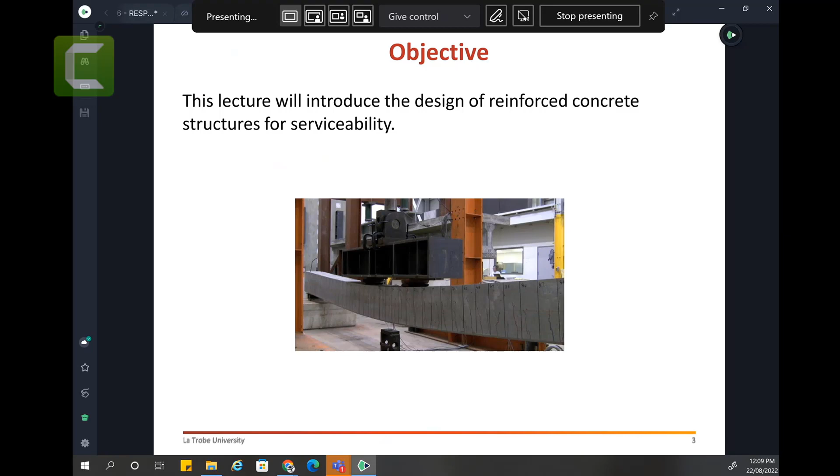So always practice everything. And what I'm trying to say, as we go through the deflection check and design, try to remember what we did last year, which was we didn't do anything, only a 5-minute or 2-minute check. It was one formula to use, and see what we're doing today. That will build a good understanding in your minds as well.

So we got a couple of sections, but hopefully I do them within 40 minutes or less, just so you can have a careful run through a very good example at the end. So there is some introduction here. It's kind of general. I will take you through. And yeah, deflection, we're trying to avoid deflection for serviceability. So we talked about this last year as well for steel or timber.

What we did up to week 5 was a strength check. We need to make sure the beam will not break and come down due to bending. The other check we did, that was last week as well, is shear. Shear is the other action that stresses our concrete beam. So bending, we talked about it before. Last week we talked about shear. We're good at it, and now we have to check for serviceability.

And with deflection, it will not collapse and fall down. However, too much deflection will compromise the standard requirements. So engineers are required to always make sure they document what deflections they had or follow standards. Too much sagging may crack the materials, the walls which the slab supports, the finishing materials like tiles. If your slab deflects more than 20 mil for larger spans, or 25 mil in shopping centers, then all the tiles and the finish will start popping up and getting cracked, which is a fault by the designer.

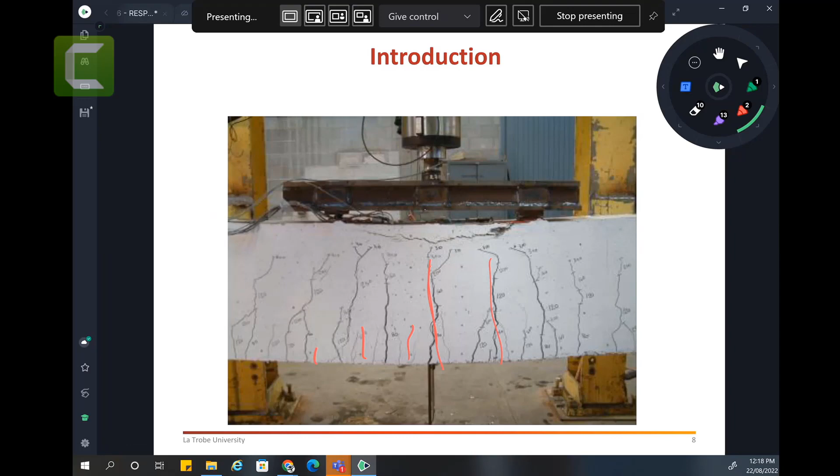And they are micro cracks because it's well designed. As an ultimate design, we designed for the ultimate case. Cracks will be generated all over the place, progressing to the neutral axis, and that's where the problem is going to happen in terms of finding the inertia value. So basically, these slides are summarizing the story of how we have primary cracks and secondary cracks, which will cause that complication, and we're going to see how we can control those.

So those randomized, complicated, different progressions of cracks will eventually cause extra curvature in the RC beam. We know from steel and timber, if we got a piece of timber or steel, they will all elastically flex and curve. That's fine, but we have good tools to calculate this. And if you remember, I've quickly searched for one of those tables like this one here.

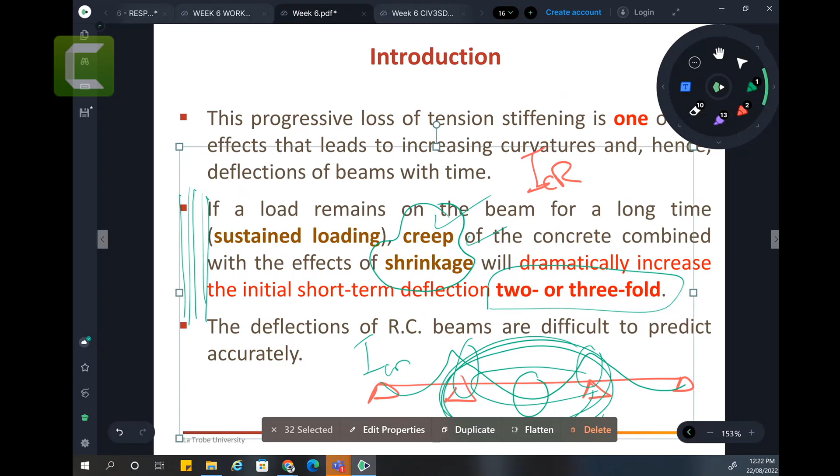The good thing, as I said, with the second item talking about creep and shrinkage, the standards gave us a very, very friendly formula. I will show it to you in a few slides and you're going to practice it, which helps us consider the creep and shrinkage and add it to our deflection. This is called the long-term deflection.

Now, with the I cracked business I was talking about, that's where you need to employ some mechanics of solids skills to go and calculate it. We will talk about this, and this summarizing point here was saying that's why it's difficult or a bit lengthy to calculate RC, and we're working with a material where there is no relationship to tell us where exactly the crack is moving. There is no such formula. Maybe if you guys research the new technologies, you will find a better gauge for that. But it's always an experimental formula that we follow.

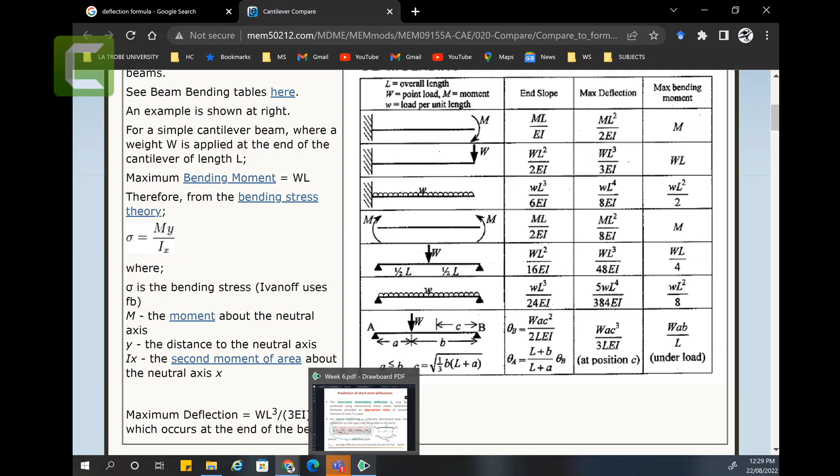So if you have a simply supported beam with a point load, you can use this and it will give you the theoretical analytical answer straight away. If you have uniform load, you can use this. This one is just another form. You're definitely going to use it in your examples and maybe in your exam or test if you have deflection questions. So this is a simplified deflection formula, which helps us determine the short-term deflection delta S. Next, I will talk about its details and ingredients.

So let me quickly talk about this part here. Instead of being a function of W, the loading, they made it simple because, as I said, one of the problems in concrete design is that it's not about what's happening at one point or one section, like here at the maximum.

It's also a function of what's happening at the ends. Okay, that's why we use this friendlier, easier or better formula, where it's going to be a function of the bending at the ends and the bending mid-span. Okay, so that was the reason why we have a different presentation of the deflection formula.

It is a function of bending because we understand when we check deflection, it's not only about what's happening at the maximum point in the beam, like what we did for reinforcing bars. We go to the maximum bending and design for it. No, here we have to look at the entire beam, what's happening over the span. And we know here we may have a negative, positive, negative. So how are we gonna put them in this mix? This formula will help us to do this.

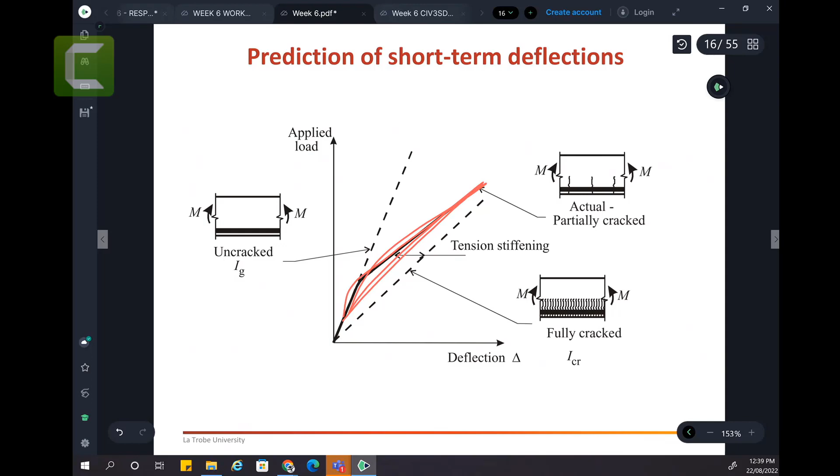That's the actual partially cracked section. So let's come back, taking you back to the main equation that will help us calculate the short-term deflection. This is all okay, just taking from the actions. This one is straightforward. We're going to show you how to find the effective span, these are straightforward here. This guy, we're talking about this guy. So before we can find the I effective average over the span, we have to find I effective, which is here, and that's where we stopped just now, which is here.

Here we go. And the standards try to guide us and say, use this relationship to find your I effective, right? And make sure it's going to be less than I effective maximum. And you will practice this carefully and also go there and question, as we discussed typically over the workshop, try to make these questions, why is this happening? And then you're going to learn more. So there are a couple of properties we need to calculate typically for this guy here.

Some of them you need to employ mechanics of solids, I think most of them. So let's start, the slides will show you how we find each. I think most of them you've studied over the past three and a half years, but again, if we don't practice things for several months, we're going to forget it, so that's fine.

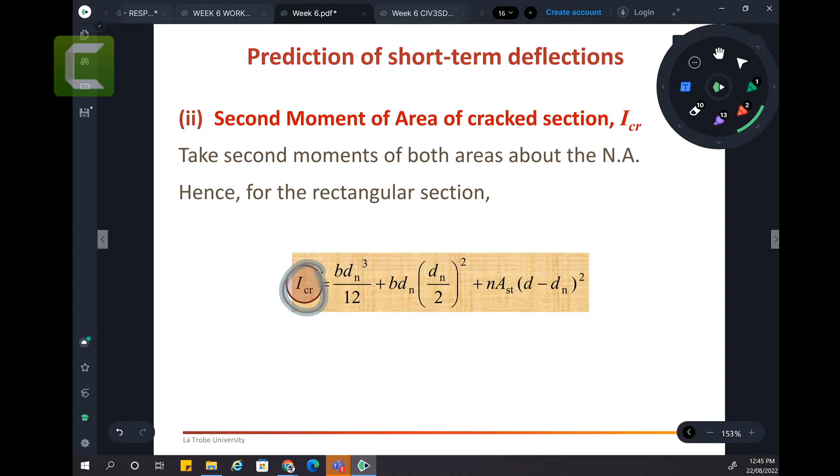So here we're just applying the second moment of area method to calculate the I crack, something you did in mechanics of solids, and you're going to remember it from your examples. The only new thing here is we converted the steel area to concrete area by multiplying it by n. That's all you're going to see this semester.

So we're done with the I crack. I'm just staying focused with what we're doing here. We're trying to calculate this guy, and as we said, this is a function of I effective. We're done with these two. Now we just need to know how to find the cracking moment.

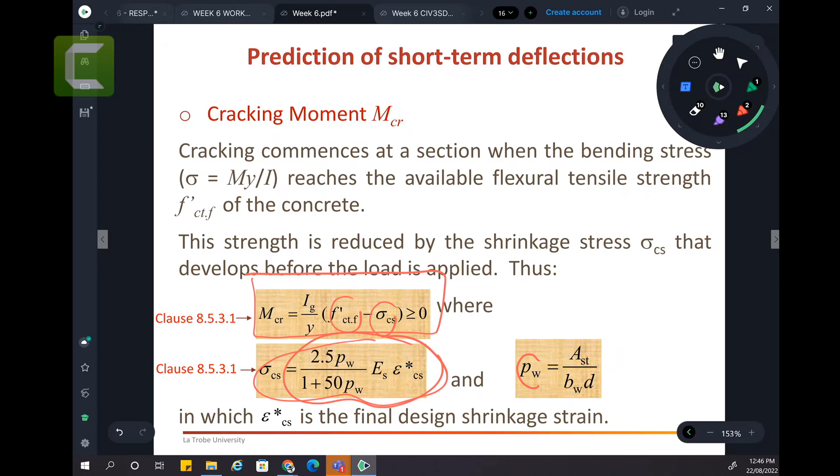Inside this formula, they have added some properties to consider for this design, so you can straight away calculate it. They made it a function of the compressed stress, because we know we're compressing the concrete side and have to consider it in our calculations. Maybe we're going to go through these details in the example as well. Don't just look at it - add some imagination as you look into the parameters and see what they physically mean.

So I think by now, there was another property, which is the moment, and this comes from statics. We will show you - the M star was the last parameter in the equation for finding the I effective formula. That was the last property we have there.

M star short term just comes from the analysis, but you have to only take the short term, which is the WS, and we will talk about this. We don't take the ultimate - we don't take 1.2 by 1.5 dead load, live load. So pay attention to these things to make sure you're driving it the right way.

There are some checks to do, because when these slides talk about finding MS, it depends on how it's compared with the M crack. If it's less, then we can use - this is really important to say to you guys - there are some shortcuts to do.

There are some shortcuts to do in finding I effective. If your M star is found less than M crack, we can straight away say your I effective is equal to I gross. That's how we can do it. I think we're going to have a couple of examples which show you this.

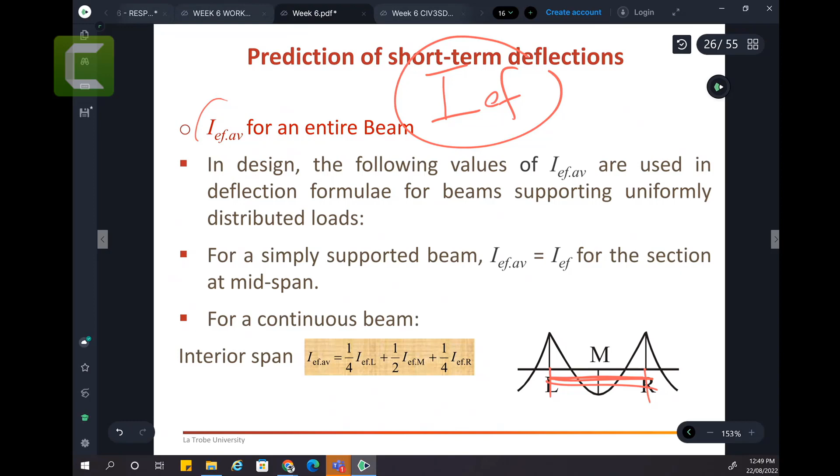After you find the I effective, you have to treat it over the span, and that's what we're going to do in our example, which we need to start soon. But in a test or exam, you may be given one spot to worry about, or you may be told that the I effective is the same over the span and you don't need to repeat it.

So that's a quick go-through which takes most of the time, the short-term deflection. Now I'm quickly going to run through the next few steps in one or two minutes. This one is not really too much - deflection is, here we go, that's all what you need to know. So what we talked about so far is this guy, and I showed you that formula, which is a function of I effective, I effective average, etc.

So up to now, you should be able to calculate this. Then what we're saying, go and calculate sustained. Now, don't think you need to repeat everything again. It's just going to be a direct relationship. It's just a ratio, and what's going to change from here to there is the loading. Here, we're just going to calculate the sustained load on the beam, like the dead load.

The dead load is sustained. We're going to consider it, and you don't need to repeat what we've done before. You just need to use ratio. You're going to see how we do it, and then you multiply it by a KCS factor. KCS factor is the creep and shrinkage factor, which we're going to show you how to calculate. It's just a standardized formula. We will use it based on your top and bottom reinforcement, compressed and tensioned reinforcement.

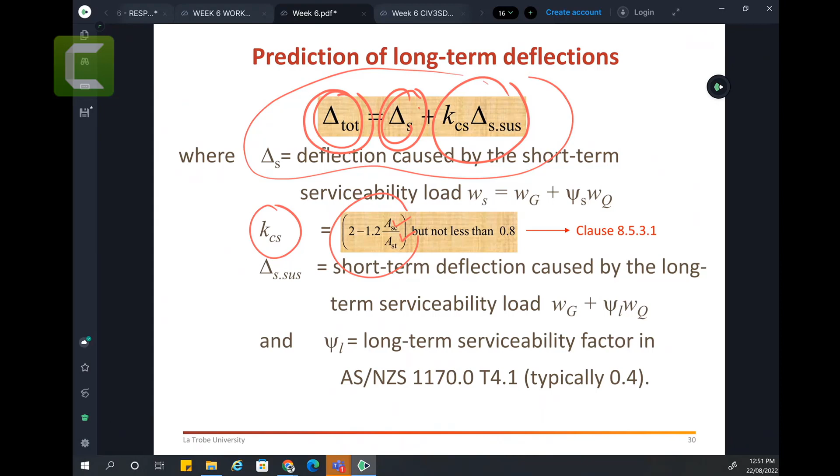So that was about calculating your total deflection. So this is your actual deflection after 20 years or so that your concrete beam will experience. It's coming from short-term deflection when your live load is sitting there, and this is the long-term, which is impacted by creep and shrinkage. If you have no live load sitting on your slab, your actual deflection is going to be less than delta total.

In terms of limitations, as I said to you before, it's up to the 1170.0 standard, which you practiced before and you can revisit during the examples as well. That was limiting the deflections we calculate.

Now, let me quickly also talk about the method that I was showing you. It's called the simplified method to calculate deflection. So all those slides we're going through, 33 slides, it is called the simplified deflection method, which most of the engineers use. You remember with the theta V we talked about for shear, there was a simplified one. We use 36 degrees, and there is a refined method, which with theta has a lot of iterations. So that's why we leave it to the software to do it for us. However, with deflection, most of what we do, we use the simplified method, and we're going through it together now.

Now, there is the deemed to comply span to depth ratio. Sorry, the simplified method we did, but this is how the standards call it. It's a deemed to comply method, where you just need to use this relationship. This relationship can give you straight away the deflection. Now, which one to use in a test or exam depends on the question. So you have to study both.

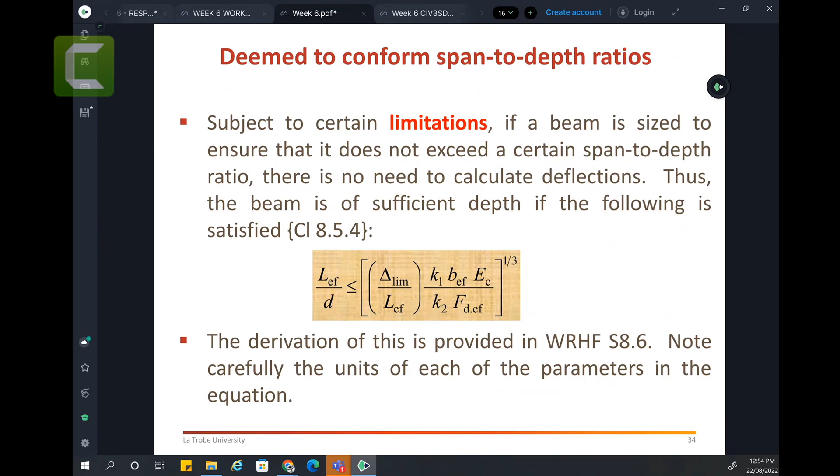But what I'm saying to you, if you want to provide some tender drawings, they give you 1 week to quickly sketch up some drawings for the builder to price a job. I would use these formulas to quickly give me a sense about the depth of the beams and slabs. So it's kind of a preliminary estimation, but it's safe. It's safe because it's deemed to comply by the standard, but it's not economic. You cannot use it for big developments. We use it just to give us in the slabs some thickness to start with, and you're going to practice using them during your examples. There are just some straightforward steps, not too much engineering.

The last section I will just quickly mention to you. This is the last slide. It's crack control. This is just kind of a different chapter. Don't mix this slide with whatever I talked to you before. Before was all about deflection calculations.

And the main thing you need to focus on is just try to remember some mechanics of solids skills, know how to calculate the I effective, then I effective average, because I effective average is going to sit in a formula which will give you delta S. All right. Now I'm saying it because I teach it, but I know you need time to do it, guys.

So as my typical advice is, go through examples, then close your examples, try to solve it without seeing the solutions to make sure you follow, because maybe some of you are not following.

So this slide here is simply talking about crack control, which is just telling you there is also, for serviceability, for complying with the BCA standards, you have to make sure your steel is adequate to control cracks. And we're going to experience this carefully during our weeks when we teach you slabs. And we've already given you some requirements like the 300 spacing, etc. But we will touch on this more.

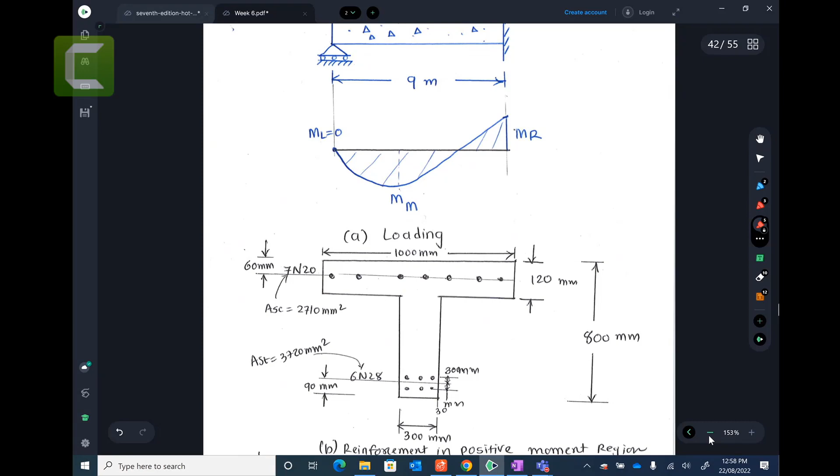So let's do this. Calculate the short and long-term deflections for the propped cantilever beams shown in the figure. I think they have not put the propped cantilevers here, let me plug this one in as well. So these details are given as part of the example, part of the question. So you have these propped cantilevers here, where one side is fixed and the other side is supported by a roller support.

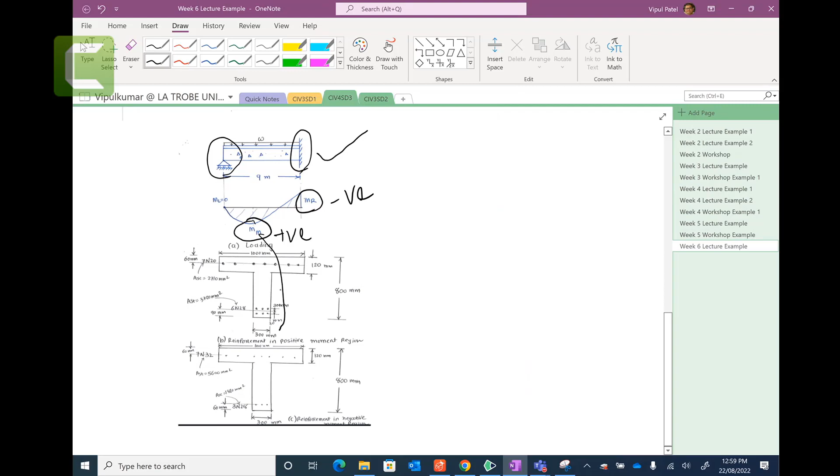The beam is doubly reinforced T sections with the dimensions and reinforcement shown for the positive and negative moment regions in the figure. So the positive moments are here at the midspan, and at the support you have negative moments. So at positive moment, this is your cross section here, and at negative moment, this is your cross section here.

The loading is given: dead load 60 kilonewton per meter, live load 40 kilonewton per meter. Concrete compressive strength is given, the Young's modulus of the concrete is given, the modulus of the steel is given. You can find the modular ratio, n equals the higher modulus of elasticity over the lower, so that's 6.6. The short-term factor given to us is 0.7, the long-term factor is 0.4. Shrinkage strain is given to you as well.

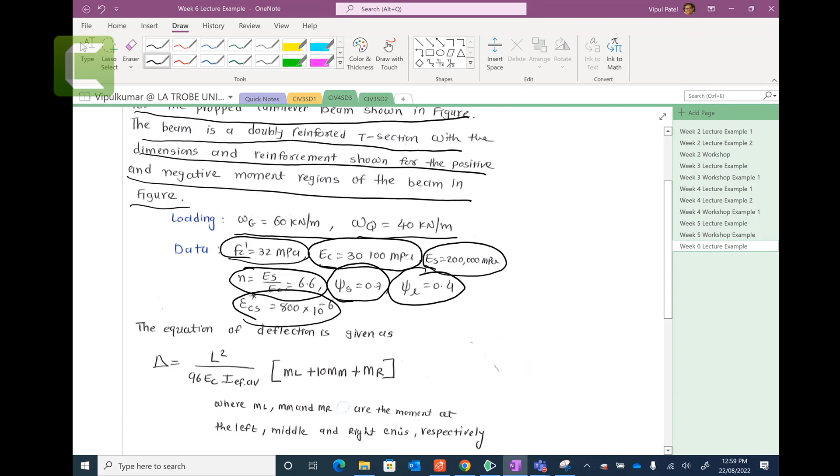So if you want to extract the short-term and long-term factors, we have standard AS 1170. You remember this one from SD2. You don't need to carry these standards, by the way, this is just for your reference. Table 4.1, short-term and long-term combination factors. 0.7 based on the different classifications is given in 1170, but it's given in our example. So you don't have to worry, but I'm just showing you that it is coming from 1170.0.

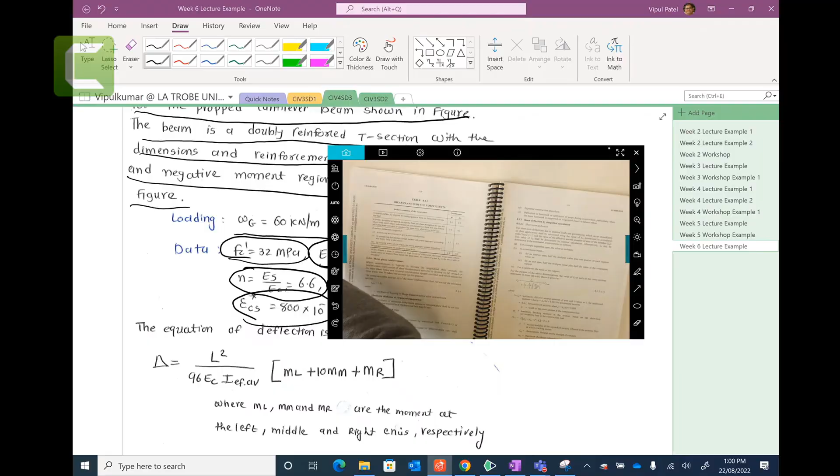Ec, and this one I think is also given in our standards, if you go back to section number 3. Here you go. So in that case, Ec is 30100, and for steel, somewhere they mention it as well. Yep, modulus of elasticity for steel, you have 200,000 megapascal. So all the details are given there, but also already given in this one.

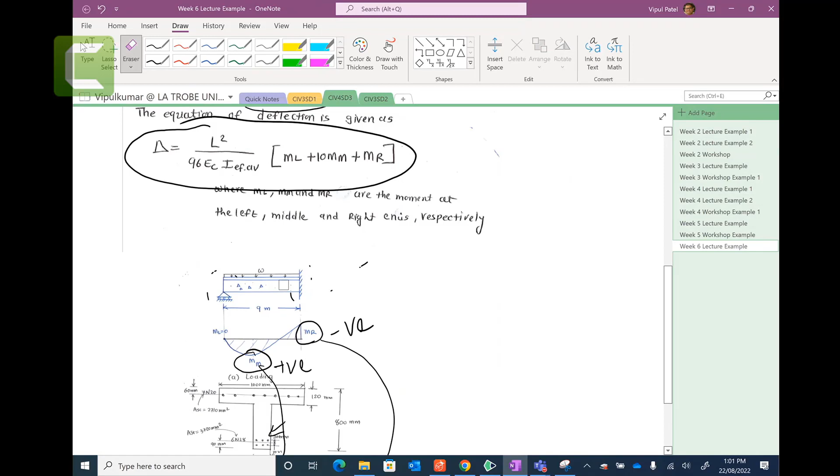So we need to use these equations to calculate the deflection. We need to find the total deflection. What total deflection means: let's say this will deflect something like this. So let's say this is delta total that we need to find. What is the deflection due to live load and dead load? Now you might say that, okay, we learned this one.

In our SD2, let's say you have load P and this beam will deflect, let's say, delta. In that case, if you remember, this delta will be PL cubed over 48 EI. And if you have a distributed load W, then you will get delta equal to 5 WL to the power 4 over 384 EI.

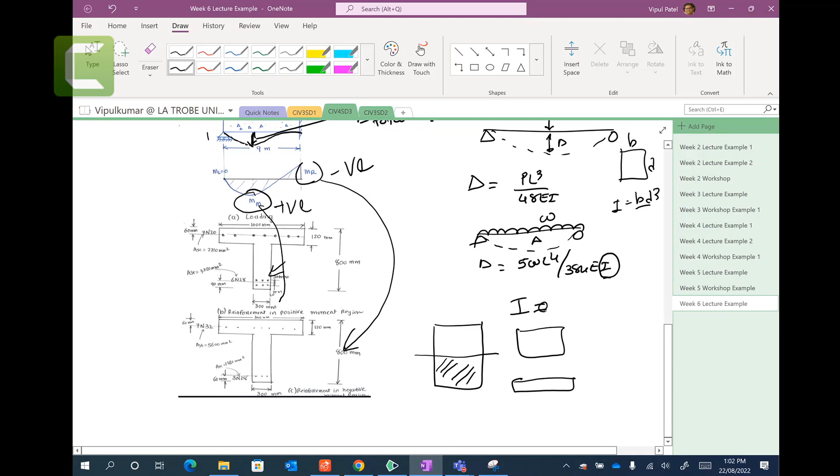Now all the details are good, but the trouble is here. Trouble here meaning we don't know I. Well, if you have a steel or something, BD, you can find BD cubed on 12 easily. But if it is made of concrete, then the standard doesn't allow you to use this I gross, because concrete cracks in tension. So if it is concrete, this portion will be gone. So your concrete is like this, and you have a steel bar here. For that case, the standard tells you that you need to use I effective instead of I.

Okay, that sounds good. Where can I find I effective? The standard gives you this I effective in clause 8.5, deflection of beams. There are various methods: 8.5.1 general, 8.5.2 deflection by refined calculation. There is not much given here about refined calculation; they want you to figure it out by yourself. And then beam deflection by simplified calculation. That is the main focus here.

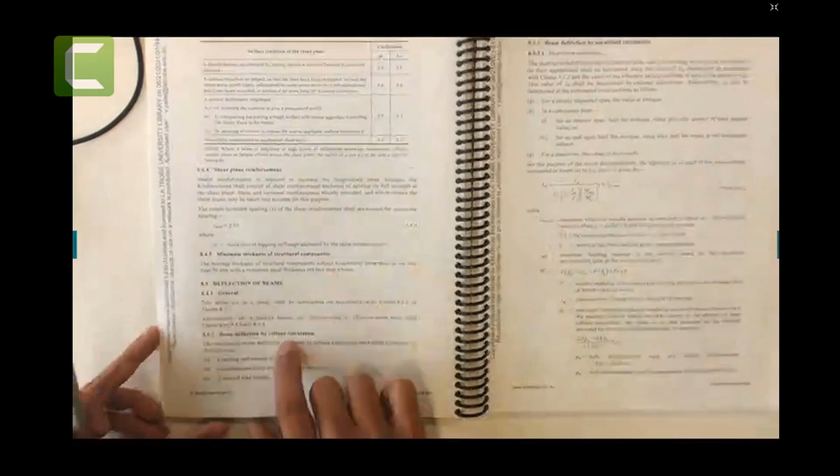Clause 8.5.3, and clause 8.5.4 is deemed to comply for reinforced beams. So there are kind of three methods: refined, simplified, and deemed to comply. Among them, we are mostly going to focus our lecture on clause 8.5.3, which is the beam deflection. In that one, again, you have short-term deflection and long-term deflection, and we combine both of them.

Now, as I mentioned, in those equations which I showed you, like PL cubed on 48 EI, we did the deflections and we also calculated the I. But when it comes to the reinforced concrete beam, we need to talk about I effective, and the equation is given here: I crack, I. So we need four terms to get the I effective. First, you need to find the moment of inertia at cracked sections, I crack. You need to find the moment of inertia I gross. Then you need to calculate the cracking moment. You need to calculate the applied moment.

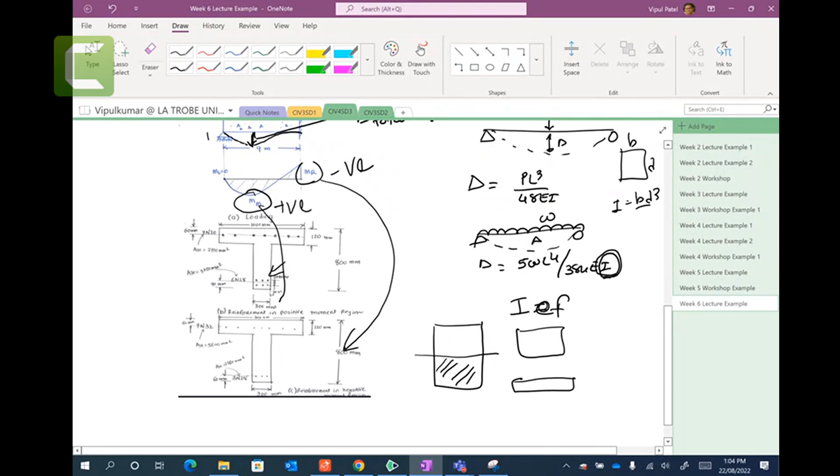So that sounds good. Let's put that equation here. Where is that equation? Here you go. Delta equals L squared over 96 Ec I effective, times the moment at the left side plus 10 times the moment in the middle plus the moment on the right side. Okay, so let's find each term one by one. Length is given to us, 9,000 millimeters. Where is this given? Here, the length of your beam.

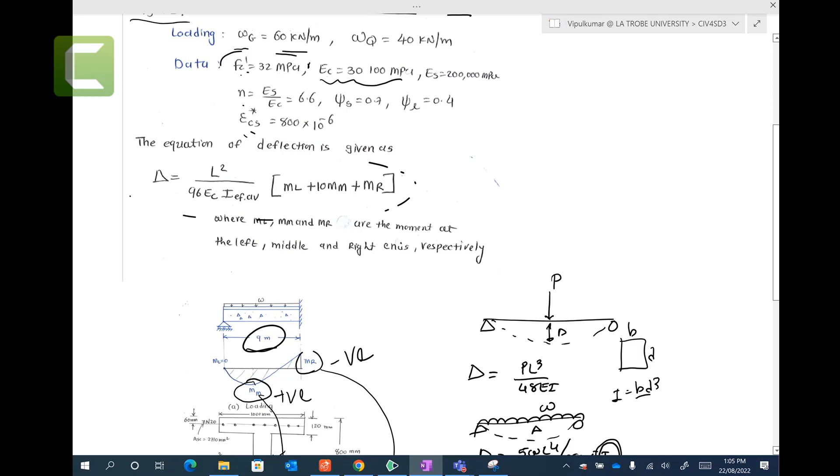Ec is given to us, the Young's modulus of the concrete. That is given here. Ec is 30,100 megapascals. I effective we need to find. Left side moment, middle moment and right side moment. Now I think the left moment would be 0, because here you can see this bending moment diagram. ML is 0, so that is good.

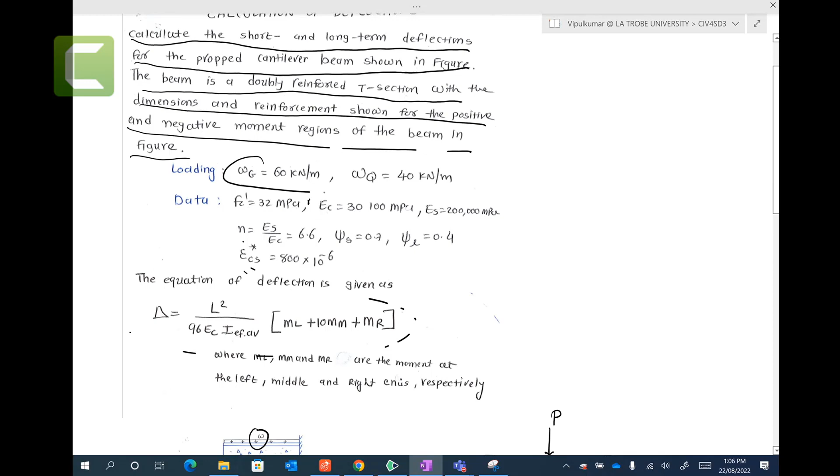This one in the middle. So in the middle we will have a positive moment, and that is WL squared on 16, right? That's just a bending moment. You don't need to worry about this one; in the test it should be given to you. So what is W? We have two W's, for the short term and long term. So the W values we can get are 60 and 40.

So W for short term equals WG plus the short-term factor times WQ. WG is 60 kilonewtons per meter, 0.7 here, times 40 kilonewtons per meter. What happens here? Look, this live load is reduced by 30%.

Because when you load the beam in the first seconds or first minutes, you don't have all the live loads. If you are sitting in a new building, you will not have all the users starting to use the building in the first minute, first 2 minutes, or a very short period, or half a day. The users will start coming later. So the standard says in the short run you can reduce your live load by some percentage. If you simplify that, you get 88 kilonewtons per meter for short term.

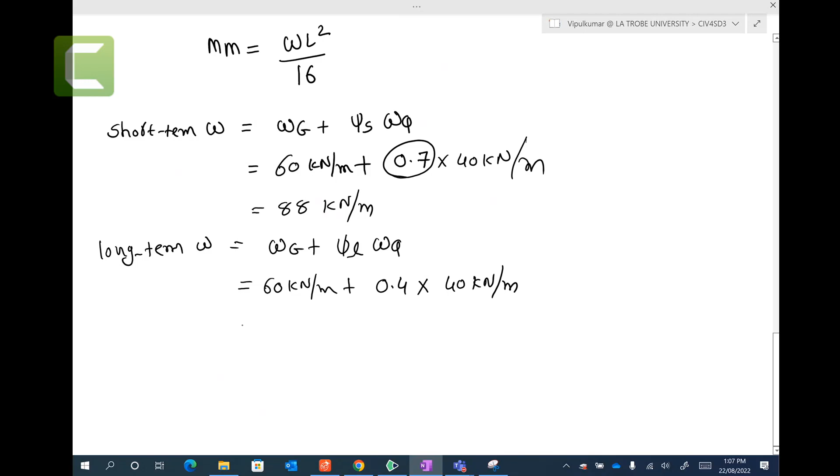For long term, W is WG plus the long-term factor times WQ. So 60 kilonewtons per meter, long-term factor 0.4, and 40 kilonewtons per meter. So you get 76 kilonewtons per meter. Right. So now let's calculate MM. For short term, you have W, 88 kilonewtons per meter, times the length, 9 meters, squared over 16, and in the middle it would be a positive moment. So you get 446 kilonewton meters.

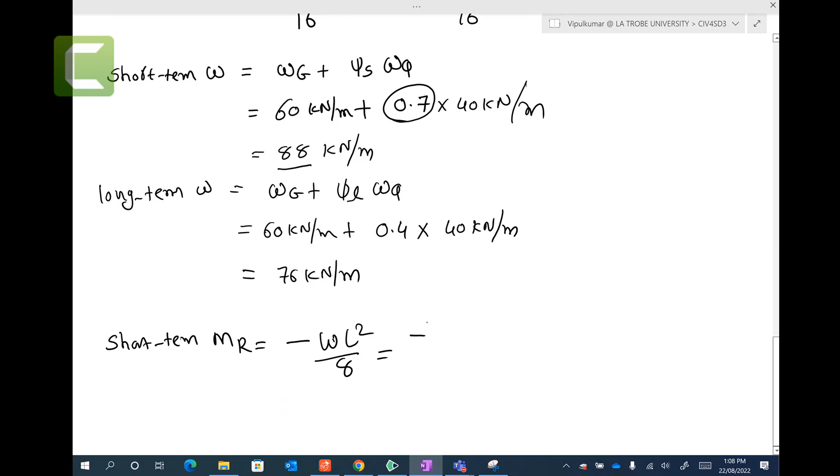And for short term, MR on the right side would be negative, because it's the negative MR at the support. So that would be minus WL squared on 8, which gives you minus 88 times 9 squared over 8. You get minus 891 kilonewton meters. So we found MM, we found MR, for the short term. Long term, same story.

Long term, we will have a... but for long term we put 76. So WL squared on 16. So 76 times 9 squared over 16, you get 385 kilonewton meters.

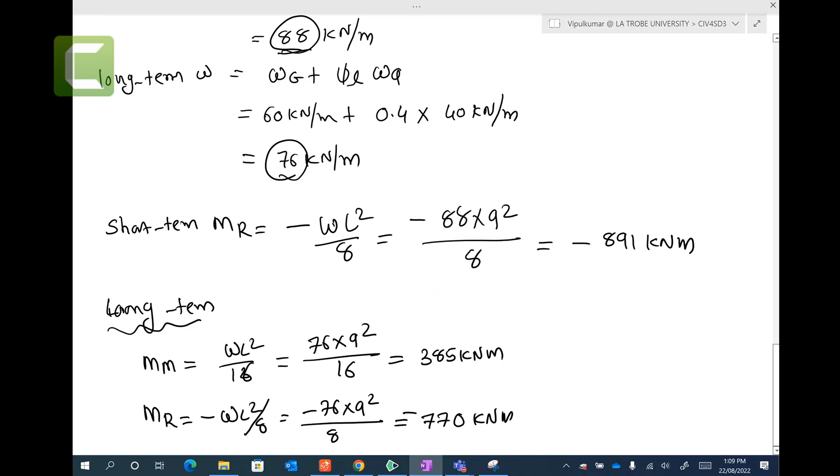And for long term on the right side, minus WL squared on 8, minus 76 times 9 squared over 8, we get 770 kilonewton meters, which is negative. So we found everything. In these equations, we are ready to calculate the deflection, but the only troublemaker is I effective average.

We have all these values. We listed all of them, but we need to find this I effective. How can we find I effective? There is a clause that we can use. I effective equal to I crack over 1 minus (1 minus I crack over I gross) times (moment crack over applied moment) squared. So let me copy that equation to calculate I effective.

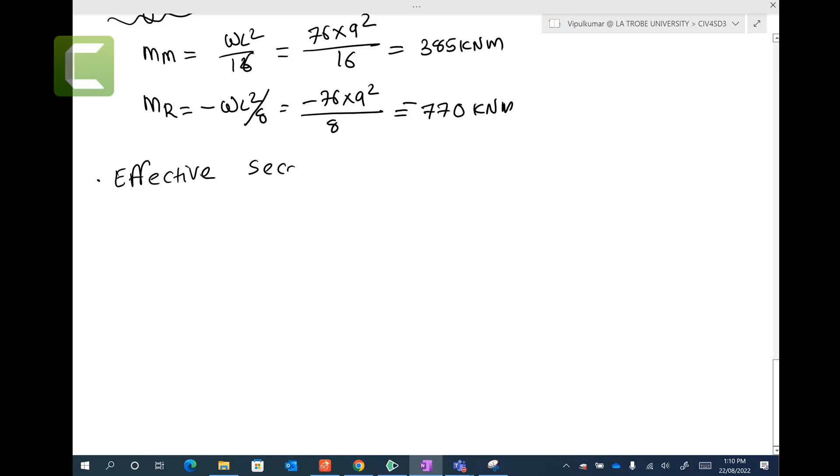Now, the name for this one is called effective second moment. So I effective equal to I crack over 1 minus (1 minus I crack on I) times (M crack t on Ms) squared. Sorry, this bracket should be closed like this. It should be less than I effective max. That we need to check.

Now, let's find each value one by one, because here we need to find 4 values: I crack, I, M crack t, and Ms. And we need to do this process for both, I effective in the middle, and repeat the same procedure for I effective on the right side, and we can take the average. I effective average equal to I effective in the middle plus I effective on the right side over 2.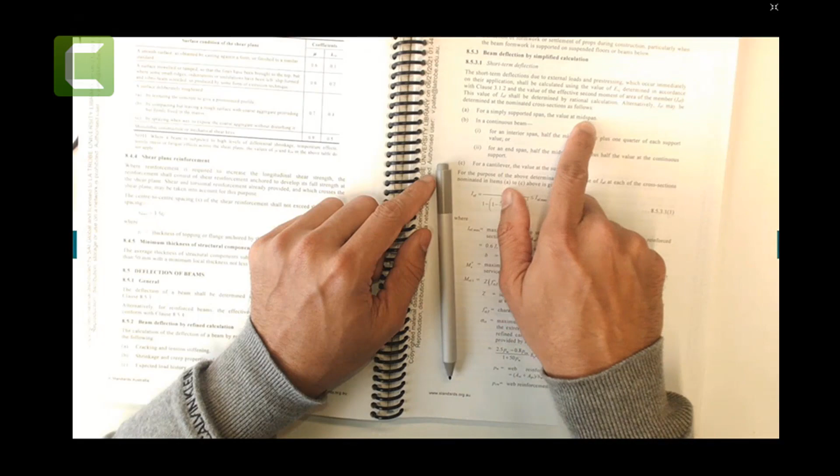So this is a long process, you can see it's repeating. So we need to find the I effective here, and we take the I effective average. Where does it say that? It states here that for a simply supported span, the value at midspan. So simply supported, no issue. If you have a simply supported beam, pin and roller, and you have UDL load, you can take the I effective in the middle.

That's easy. But if you have multi-span, like a continuous beam, for an interior span, half the mid-span value plus 1/4 of each support value. For an end span, like this propped cantilever, half the mid-span value plus half the value at the continuous support. It's just the average. We fall in this category, end span, so half at the mid-span plus half at the right side. So that sounds good. Let's crack it one by one.

So let's do this I first, because we need to get these 4 things. The cross section given here is 800 by 1000, and there is tensile reo and compression reo for positive moments, and tensile reo and compression reo here too. Depending on where you're looking, you provide the tensile reo at the bottom and compression reo at the top. Here you provide tensile and compression opposite, right?

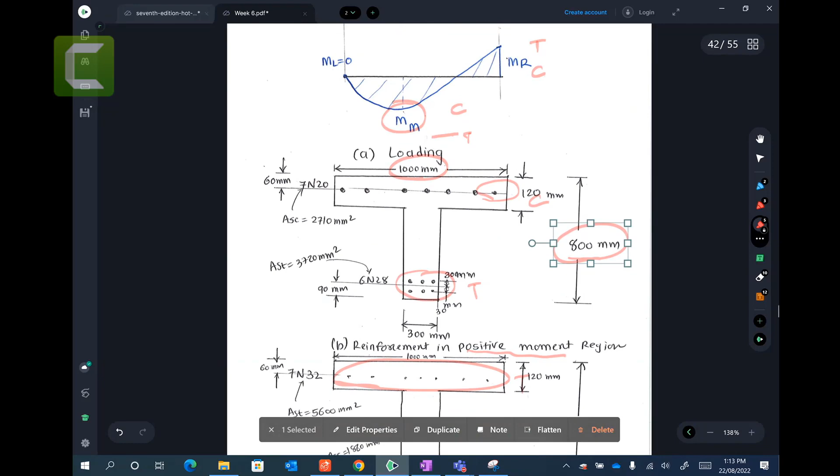So we have 800 by 1000. Now the ultimate goal, because we need to find this I, you remember mechanics of solids, we find the I. If someone gives you a T section with all the dimensions, you can find the centroid distance y bar, and you can find the I, right? The moment of inertia for this cross section, that is your I.

Simple. You can just divide this composite section into 1 and 2. Area 1, 1000 times 120, get this area. Y1, you need to take the reference, meaning that you need to put the reference line. Let's say my reference line is here. This is my reference line.

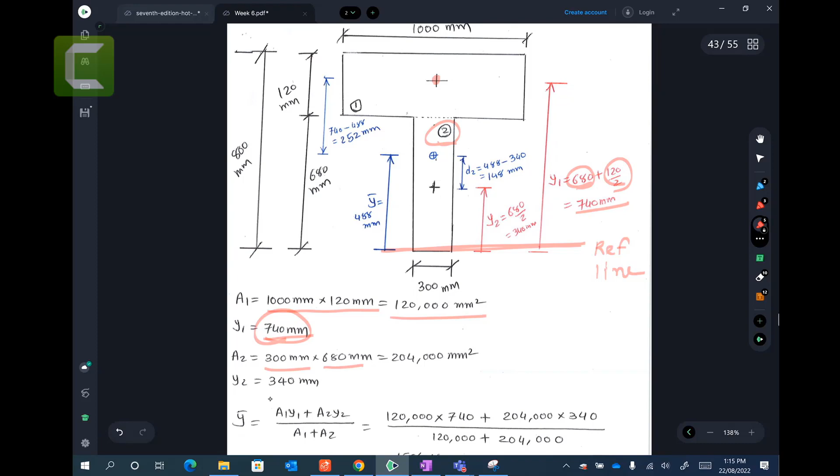So for that reference line, you can say Y1 is the centroid of this one. So it's about 60 plus this guy here. So that is 740. You can calculate for this: 680 plus 60, 740, as you can see. Now area 2, you can take 300 times 680, and the centroid for Y2, you can take 340. And if you use these equations, because we already calculated A1, Y1, A2, Y2, plug the values, you get 488 millimeters.

What is that 488? It is the centroid, the center of your section. What does the centroid represent? It represents the neutral axis that passes through this centroid. What is the neutral axis? The neutral axis is used in elastic theory, when your section is in the elastic region and, when you unload it, goes back to the original position. It divides your section into two regions. Under bending, the top part goes into compression and the bottom part goes into tension. So that is the importance of the centroid: it represents the neutral axis, which divides your cross section into compression and tension zones.

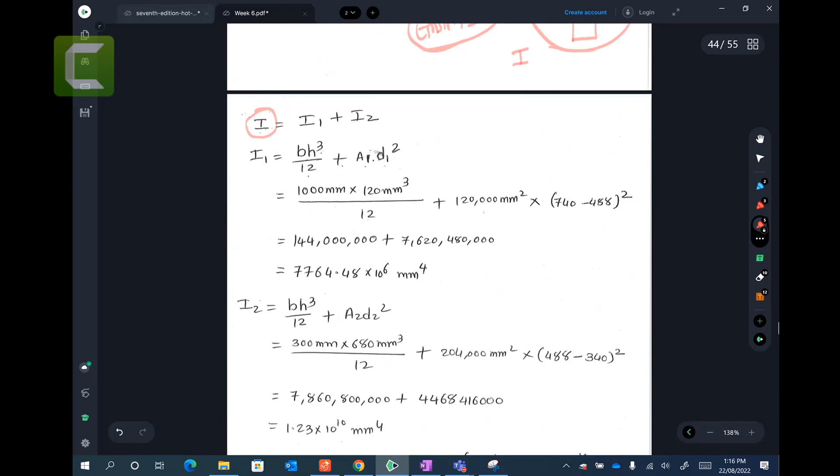And you know this moment of inertia story: if I have two different composites, I1 and I2, you have BD cubed over 12 plus A1 D1 squared, with B 1000 times 120 cubed over 12 for section 1. Area 1, we already calculated. This difference is between the centroid of section 1 and the centroid of your whole cross section, so that difference squared gives you I1. Similarly, I2 for this cross section here, BH cubed over 12 plus A D2 squared. If you add these, you get I equal to 2 times 10 to the power 10 millimeters to the power 4. So this first thing's done.

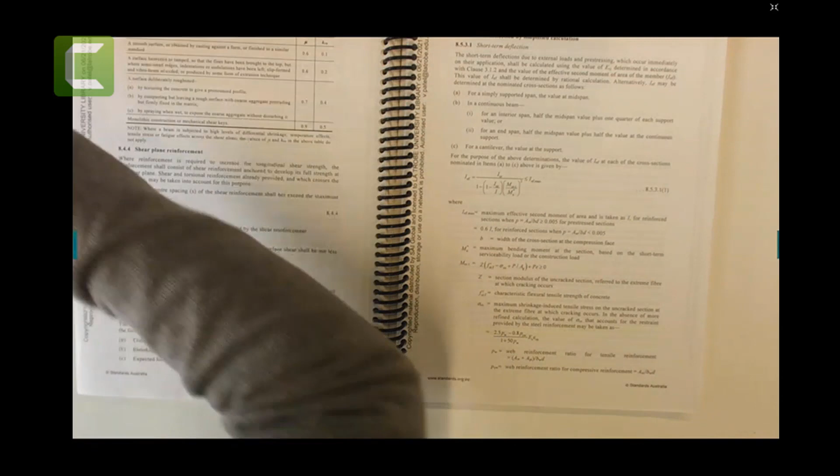The first thing is easy: I, the moment of inertia, or gross moment of inertia. This is easy, mechanics of solids year 1. You can go through it by yourself if you like, but most probably in the test we will not ask you to do this one, because it has nothing to do with concrete. It is just simple analysis, mechanics of solids, finding the moment of inertia. But for completeness of this example, I have demonstrated it.

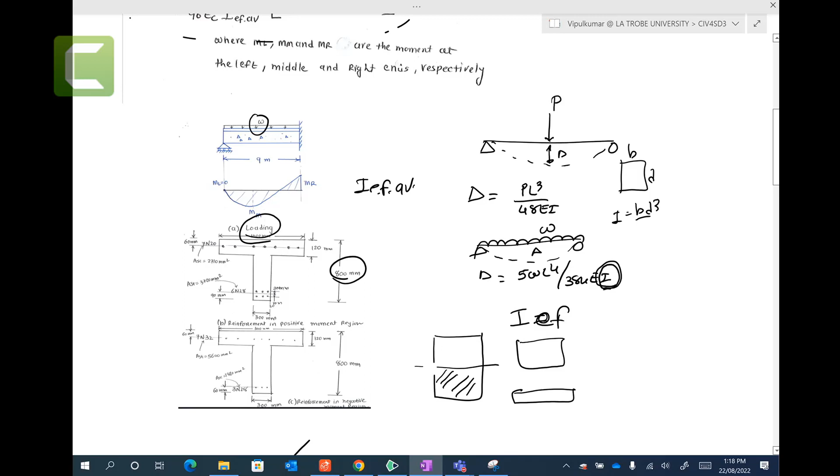So we found I equal to 2 times 10 to the power 10 millimeters to the power 4. And I would be the same everywhere, meaning I here and I here don't vary, because it's in the elastic zone. If you had different cross section sizes, you might need a different I, but we have 800 and 1000 overall dimensions, the same, so we have the same I value everywhere. Any questions so far? We found the I sitting here. Next we're going to find I cracked.

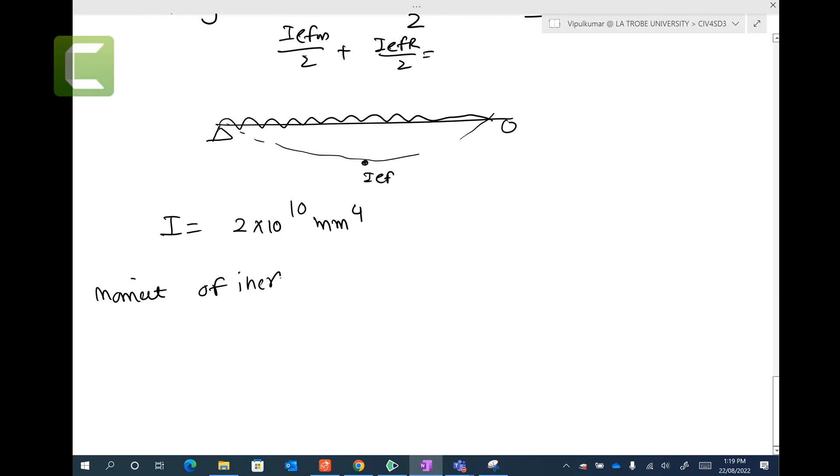Now there is I cracked, the moment of inertia at the cracked section, or let's say after cracking. So that is represented by I cracked. I gross means that, for a typical cross section, to find I you just do BD cubed over 12. Simple, neutral axis and all elastic. That represents your moment of inertia I.

But if the beam is cracked, this part goes off because under tension the concrete is no good, zero. So all this part is gone, and we are talking about plastic now. So we need to find the plastic neutral axis, PNA. This is the elastic neutral axis, ENA. Finding the plastic neutral axis is quite challenging, because for the elastic neutral axis you just find the centroid and it passes through it. Here we need a different approach, which I'm going to explain. This approach will be useful only when you have only one material.

In a reinforced concrete beam, we have concrete and steel. So the first goal is to change your steel into concrete or concrete into steel. We need to make it one material somehow. That's the ultimate goal, that's the first thing.

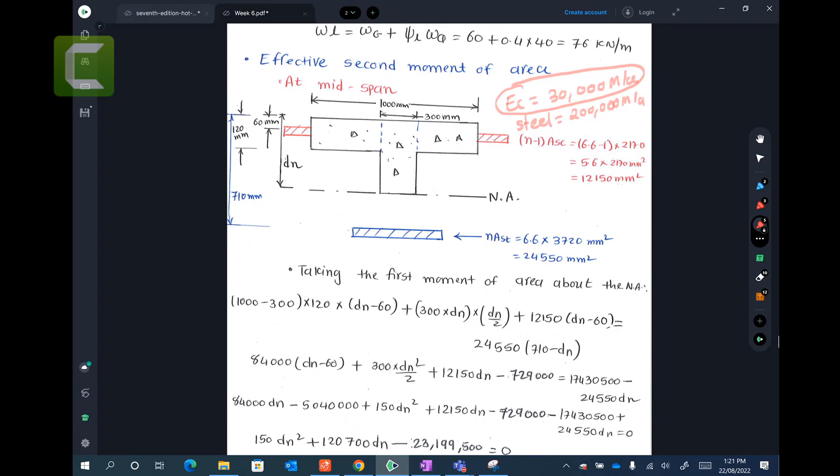The simple rule is: concrete has a Young's modulus of, let's say, 30,000 megapascals, and steel has 200,000. So the rule is, if you want to make a selection of which one to convert, you go for the low elastic modulus material. So you ask, should I make everything steel or everything concrete? Generally, whichever has the lowest elastic modulus, we make everything that. So we make everything concrete.

Let's draw the mid span first. So this is the mid span one, let me draw this one up - that's the positive moment, so this is mid span. And this is at support. Let's draw this one up here at mid span.

Now what happens? Look at this, it has these steels. This guy has steel with 2710 millimeter square area, and you have 3720 millimeter square steel.

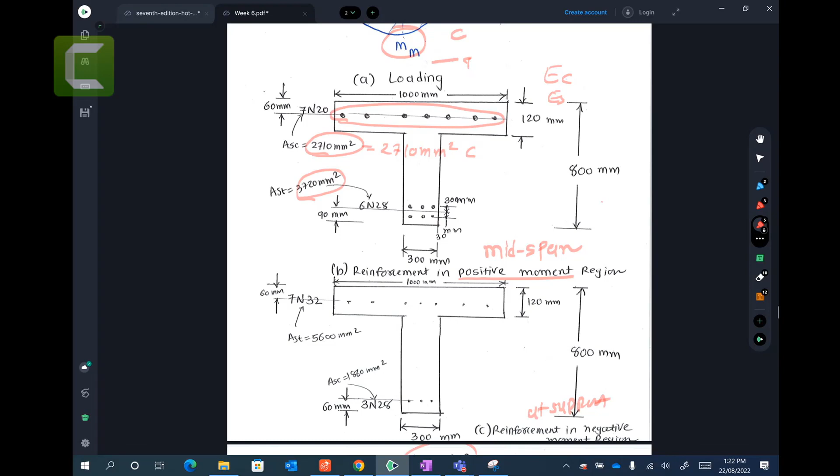When we convert this, we make sure that the area where you have steel has some strength contribution, some bending strength contribution. So we put enough concrete with area equivalent to that steel. We can't just put equal area, like 2710 millimeter square concrete - because concrete and steel have different Young's modulus. So we can't replace with the same area, we need to replace by an equivalent amount.

So that's what I've done here. Look at this concrete, this part is gone, and you have the steel bar. So what we do is multiply this: ES over EC equals... AST... that is your N, that is your modular ratio. So if I want to find the equivalent concrete area, I calculate N times AST.

So in our example, the modular ratio is 6.6, given area of steel is 3720. So if I want to replace this steel by concrete, I need about 24,550 millimeter square of concrete to replace the 3720 steel. So that will be good.

Now when you replace this steel bar, you're left with holes, right? While here there's no holes because there's no concrete - here there's no concrete, so we don't need a hole. But here, when you remove this bar, you will have an empty hole. So we need to fill the concrete in the empty hole, plus you need to replace by the equivalent concrete as well.

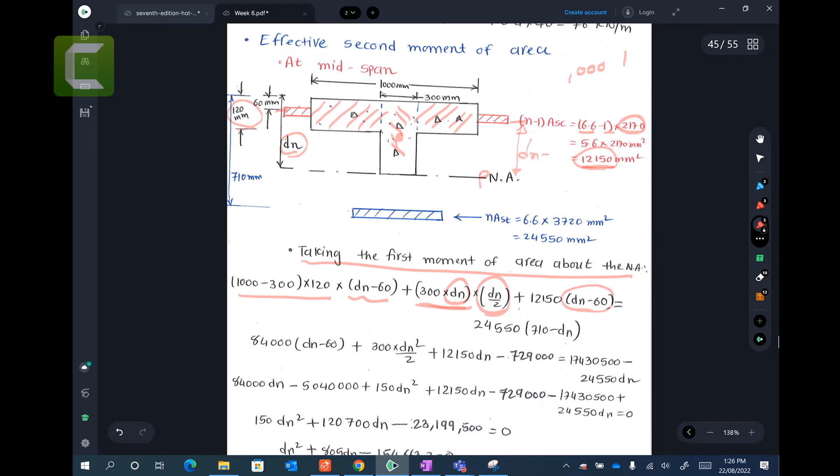Plus you have 12,150 times (dn minus 60) - that's your centroid, from this point to this point is dn minus 60. So that's the top part, on the compression side. This is the tension side, that's area times the centroidal distance, so from this point to this point is...

710 minus dn. So if you just open the bracket and simplify, you get this quadratic equation. You know how to solve quadratic equations, right - minus b, square minus 4ac. You'll get two dn values, but you choose dn equal to 160. Complicated, but we've done this exercise before. Now you just do the normal things: that concrete 1, you have bd cubed over 12, plus area times the difference squared, for concrete 2. So concrete 1, concrete 2, meaning this is concrete 1.

Let's say this is concrete 1, concrete 2, and again bd cube on 12. Area, ad square. Tensile steel, there is not much tension here. You can see bd cube on 12 is not so it's very small, so tension steel is here. This is very small, so I put 0 there. And area and centroidal distance is there. For compression steel, again is 0 because bd cube on 12 is very small, there is a tiny bit so there's not much value there. So this area times difference, you get this.

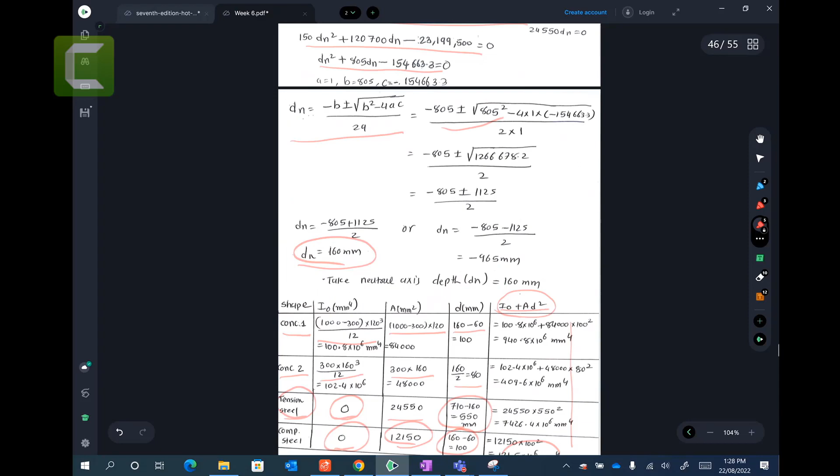It's a lengthy process. As I mentioned, in the test we are not going to ask you to find I crack, because it's just finding a neutral axis and the moment of inertia. This subject does not have a learning outcome of finding the moment of inertia, that topic was covered in your previous semester. So we don't require that skill, but you need to understand where this value is coming from. There is a full story behind it.

Of course, you can keep these numbers handy if you want to practice. But when you go into practice, no one is going to give you I-crack straight away. You need to work out how to get this I-crack and neutral axis yourself.

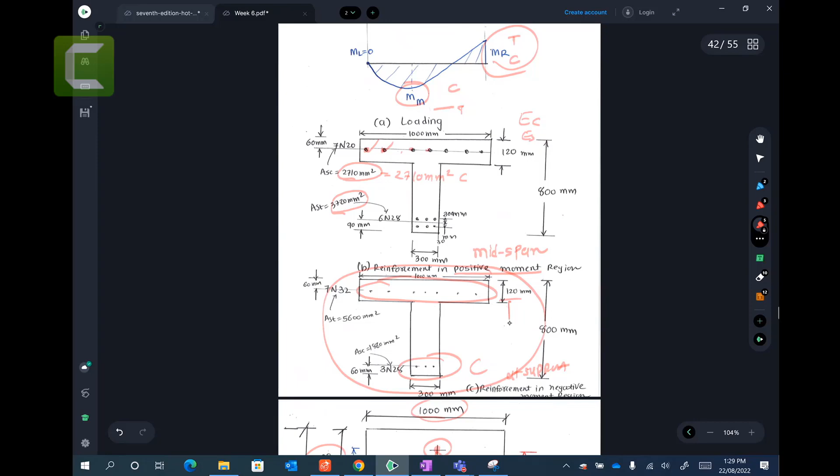Very same procedure, exactly the same for this one. Right side support is here, but what is the difference? Your tensile reo goes here and the compression reo goes here. This is compression and this is tensile, right? So in that case your figure becomes upside down, meaning this side of the concrete will crack so it's gone, and you have this compression side and this tension side.

Again, same story, your plastic neutral axis is here. Then you replace this bar by n times Ast. N is your ratio, remember, Es over Ec, and then area. So this is the area of concrete equivalent to the steel that will contribute into the deflection calculations.

Here, if I replace those bars, I'm left with 3 holes, meaning let's say I remove this bar and put the concrete bar here, which is n times Asc. But then you need to fill the holes, you need to put extra concrete to fill those holes. So therefore there is a difference: you have (n-1) times Asc, where Asc is your 1860, so you get 10420 millimeters square.

Once you've got this, how many sections do you have? 1, 2, and 3 - three different categories, or three different sections.

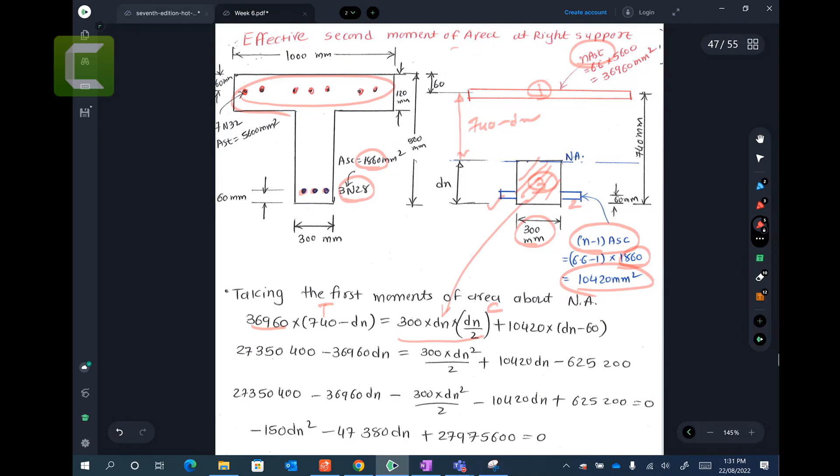So let's do this one first. I think 36960, this is on the tension side and this is on the compression side. This one, area times the centroidal distance from here to here, which is 740 take away dn. Then you take this 300 times dn, so you get this area. This is your area times the centroid, dn divided by 2. Centroid, by the way, a1y1 equals a2y2 plus a3y3. There are 3 sections: area of the first section, centroid to the plastic neutral axis; area of the second section, centroid from that section to the neutral axis; area of the third section, over its centroidal distance.

If you just simplify, opening brackets and collecting like terms, and use quadratic equations to solve for dn, you might end up with dn value about 300, maybe a little bit down, but let me find it's 302 millimeters.

So again these tables, you remember this kind of table, you just say okay you have these sections, there are 3, and if you substitute the values you get I-crack 10.46 times 10 to the power 9.

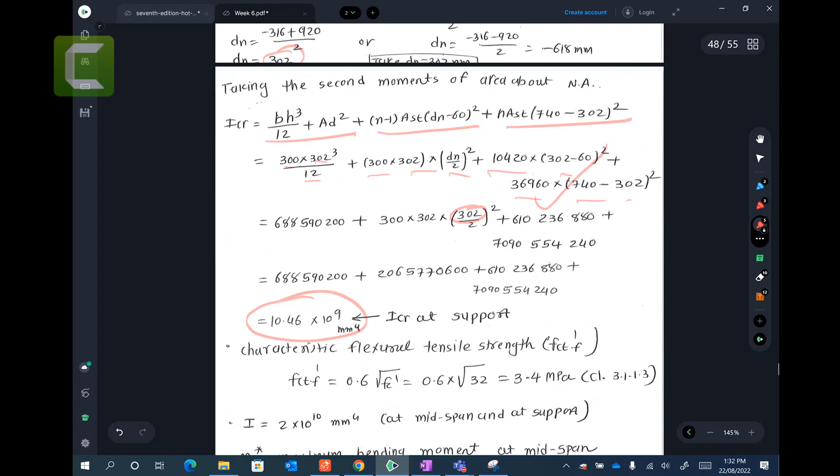Don't feel that I'm just bypassing these details. Look, there is nothing critical I can teach you here that you don't know, you are final year, almost graduate engineers. But let me know later, because of time constraint I can't go number by number, but they are there for your completeness. I put the detail in, if you go through it yourself I'm sure you'll be able to crack it. Nothing super complicated here, I think I've explained everything there.

Let me turn on the things before we move. Now, where are we now in terms of finding those details? So we got I-crack, let's get this Ms.

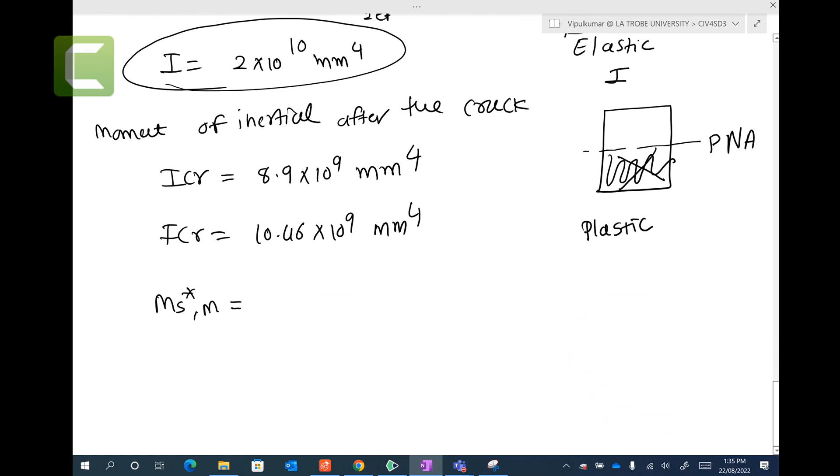Let's get this MS for us. Let me find that MS. Now this MS star at the mid height, let's say at the mid height, because we're going to work it out. I think this is at the mid and this is at the support, right? So MS in the mid height. So what is MS? Let's find it out from here.

MS is the maximum bending moment at the section based on the short-term serviceable load and construction load. So MS, we already calculated MS, the applied moment. I believe we calculated MS at the mid height, not long term, short term. They say short term, by the way. Somewhere they said that. Yeah, short term. So we need to go to short term MS, in the middle.

So not long term, very short term, in mm. So short term MM, let me go find MS, would be 446. Yeah, that's good. So that would be 446 mm, 446 kilonewton meters. Right? I hope you understand MSM.

It's just a structural analysis. It's coming from the bending moment diagram. By the way, this is coming from your bending moment diagrams. When you do the bending, please note, you need to consider the service load.

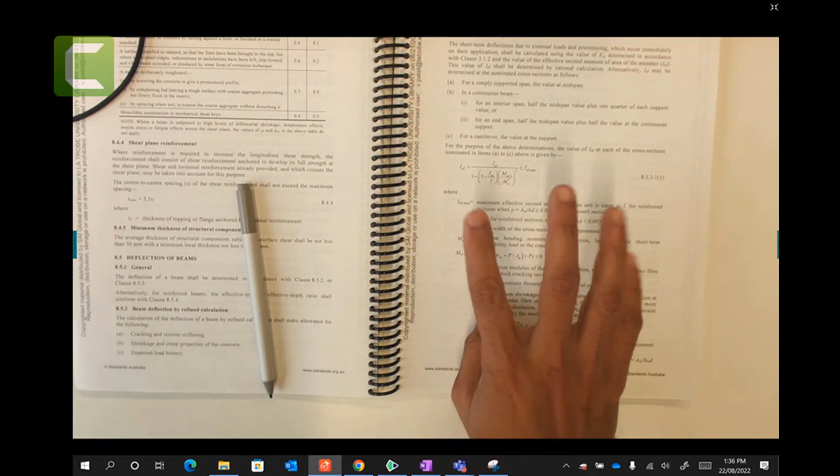There are two kinds of load. You have an ultimate load. If you want the ultimate load, WG is 1.2 WG plus 1.5 WQ. Another one is service load, meaning for service load you have WG plus psi s WQ, short-term service load. I say short-term, so I hope it makes sense. So we need to use this service load. So MSM is done, easy, which is good.

We've done this, we've done this, we've done this, we've done this. Now we need to calculate the cracking moment. The equation is given to you here. The cracking moment is Z times FCT.F minus sigma CS.

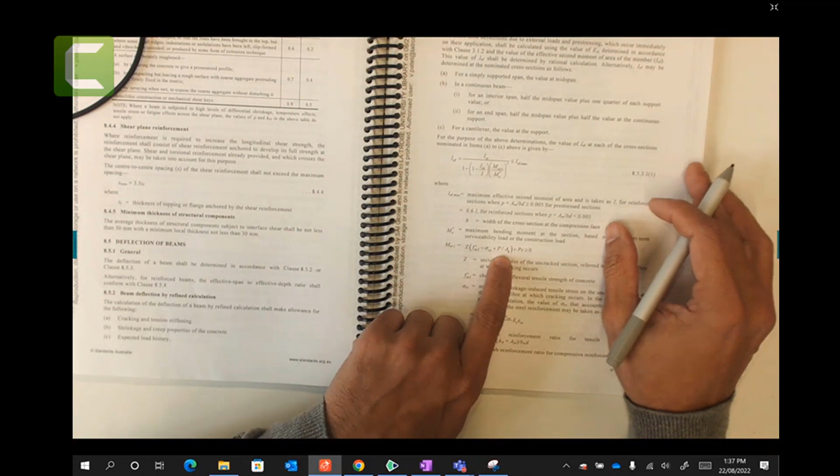I think P, we don't need to worry about, because it's a tension, it's a pre-stress. I can show you where it is, P. P here, force in tendons. Tendons mean the pre-stress in the concrete. We don't use tendons, so P equal to 0. So we have P equal to 0, plus P equal to 0.

So our equation becomes Z bracket FCT.F minus sigma CS. Let's do that. So our equation becomes M crack equal to Z times FCT.F dash take away sigma CS. Let's calculate this Z first.

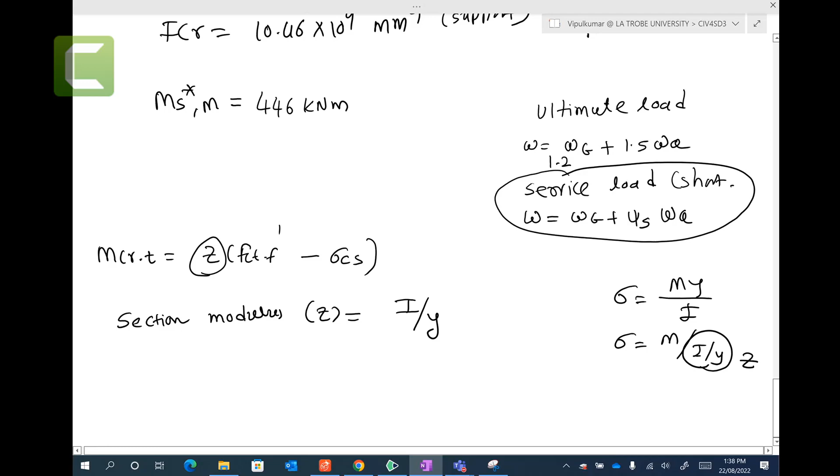So Z equal to, this is the section modulus, by the way. Z is section modulus. Z equal to I over Y. You know this bending equation is equal to My over I. So sigma equal to M over I over Y, and this I over Y is Z. So you already calculated I, 2 times 10 raised to power 10. I can show it to you, gross here.

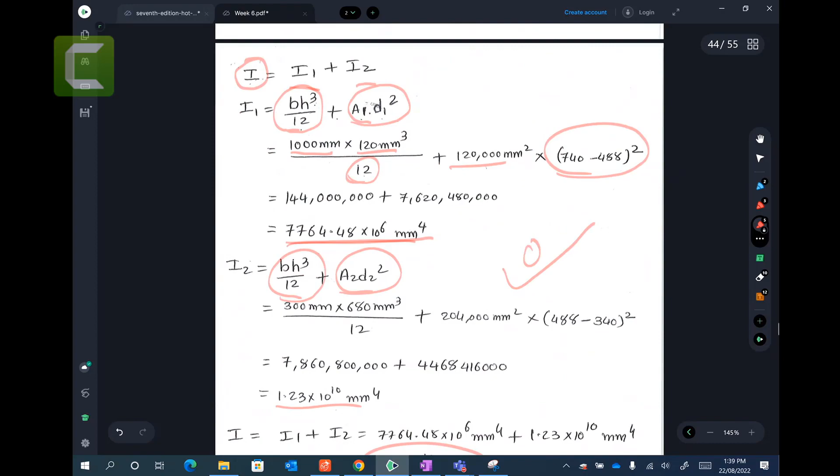And Y is 488. You remember that somewhere, 488, the centroidal one. Y distance is the extreme one, 488. You can see this distance 488 from here to here, 488. So that distance, 488, that is your Y. So Y is 488. This is millimeters to power 4, and this is millimeters.

So let me plug those values in. 2 times 10 to the power 10 divided by 488. You get about 40.98 times 10 raised to 6 millimeters cubed. Right, so that is done.

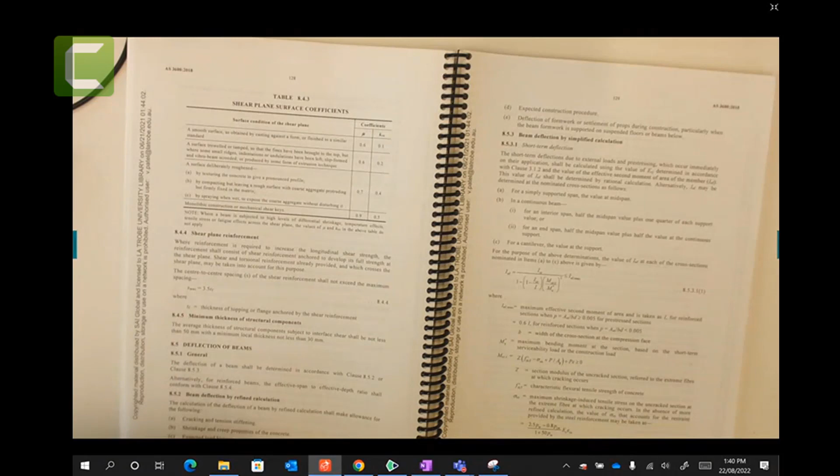FCT.F. Yes. FCT.F, if you go back to the chart, you will find that FCT.F is equal to 0.6 square root FC dash, in clause 3.1.1.3. So 0.6 times square root FC dash is equal to 0.6 times square root 32, and 32 is given in our example as FC dash. So you've got 3.4 megapascals.

For this sigma CS, what is sigma CS? Sigma CS is given here somewhere. Maximum shrinkage induced tensile stress on the uncracked section at an extreme fiber at which crack occurs, in the absence of more refined calculation. The value of sigma that accounts for restraint provided by steel reinforcement may be taken as...

So we have 2.5 PW minus 0.8 PCW over 1 plus 50 PW, times Es epsilon CS. PW is the reinforcement ratio for tensile reinforcement, and this one is the reinforcement ratio for compression reinforcement. So let me copy that equation for you. Sigma CS is equal to 2.5 PW minus 0.8 PCW over 1 plus 50 PW, times Young's modulus times shrinkage strain.

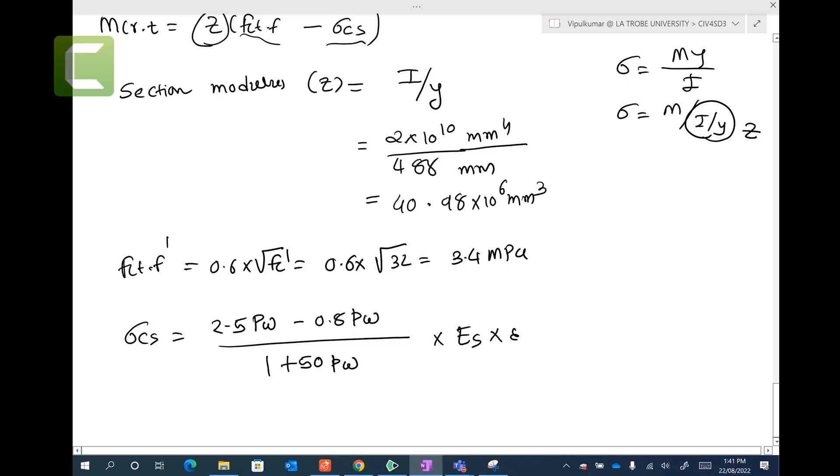So let's get the PW. That is a reinforcement ratio: AST plus APT. APT is your area of the tendons. If you want to find it out, APT, because tendons meaning pre-stress. So we don't need to worry about it, because we don't have pre-stress. I can show you APT. APT here, cross-section area of tendons. So we don't need to worry about it, so we can put 0.

So AST on BWD. In that case, AST is 3720 millimeter square. Where is it coming from? I think we are working at the mid one. So the mid one is this. AST is 3720, the mid, and here. So this is here. 100%. Okay.

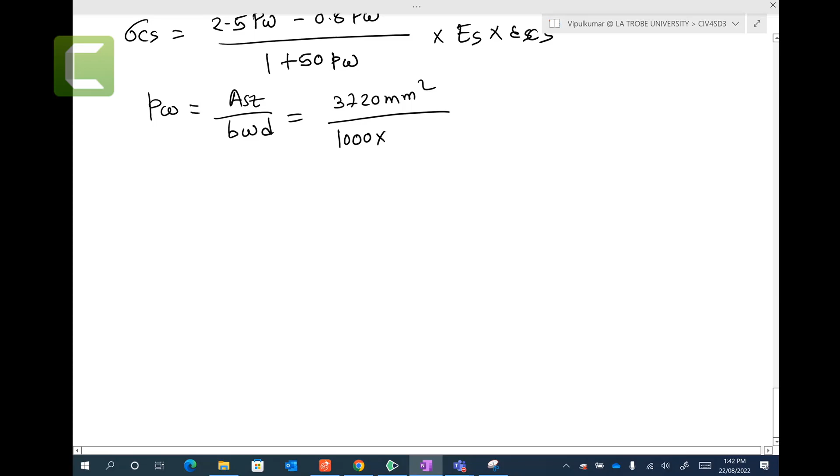And BW, I think the width of your plane, is 1000, and depth is 710. Again, I can show it to you here. So that is BW, which is your width, 1000, and depth is 710. So if you measure it from this point, effective depth, you remember that 710 millimeters. So that's good.

And if you simplify that, you might get 3720 divided by 1000 divided by 710. So you get 5.2 times 10 raised to minus 3. So that's done. Oh, 0. This is PCW, sorry. PCW. Now we have a PC. So PCW.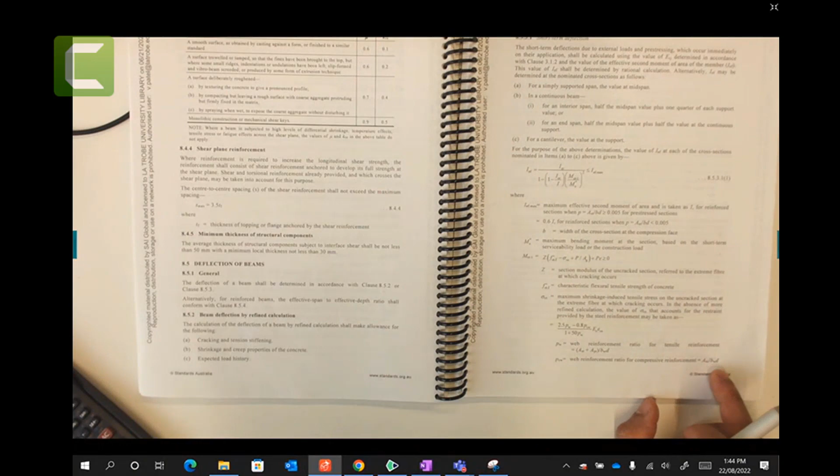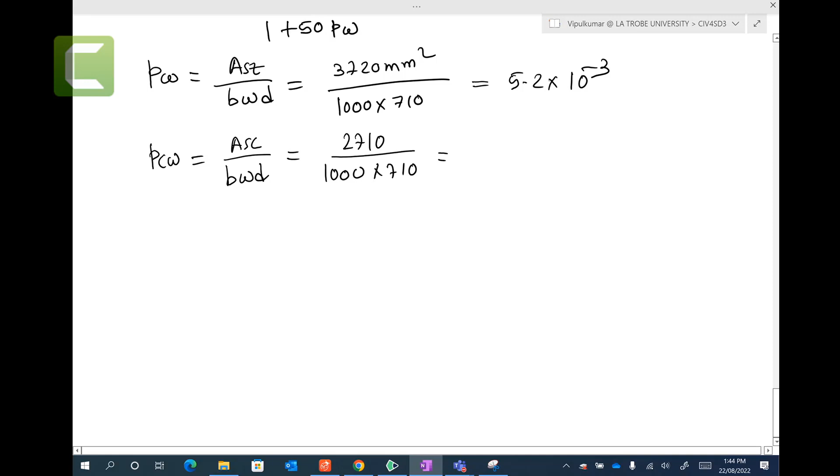Now PCW has an equation, ASC on BWD, where it's given here. ASC on BW. So ASC, you got ASC here, which is 2710. Let me put 100% back. ASC is 2710 over 1000 times 710. So you got 3.8 times 10 raised to minus 3.

So we got everything, EC and everything. So sigma CS equals 2.5 times this 5.2 times 10 raised to minus 3 we just calculated, minus 0.8 times this one, 3.8 times 10 raised to minus 3, over 1 plus 50 times 5.2 times 10 raised to minus 3, times EC 200,000. EC and shrinkage strain are given. EC is 200,000, shrinkage strain is 800 times 10 raised to minus 6. In that case, you might get the shrinkage stress 1.7 megapascals.

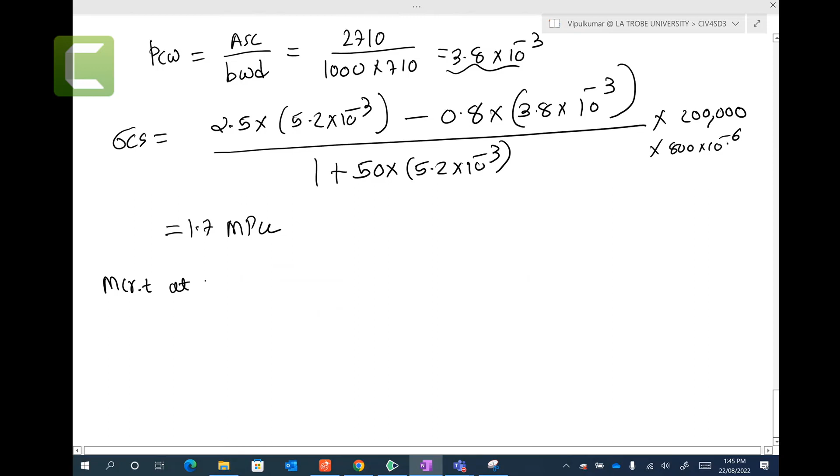Right, so we have everything now, meaning that we can calculate M crack T at mid equal to Z times FCT dot F, take away sigma CS. So Z value we calculated here, 40.98 times 10 raised to 6 millimeter cubed. Is it correct? Yep. FCT dot F we calculated 3.4 megapascals, which is Newton per millimeter square, and 1.7 megapascals. So you get 69,672,131.2 Newton millimeters, about 70 kilonewton meters.

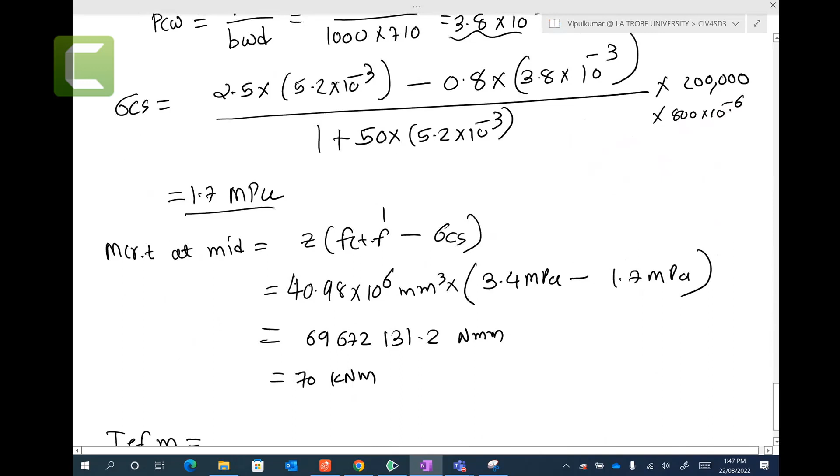Right, so that's pretty much everything we got, the recipe to calculate I effective. We got M crack, we got everything. So let's do the I effective in the middle. I effective in the middle equals I crack over 1 minus (1 minus I crack on I) times (M crack T on MS) squared.

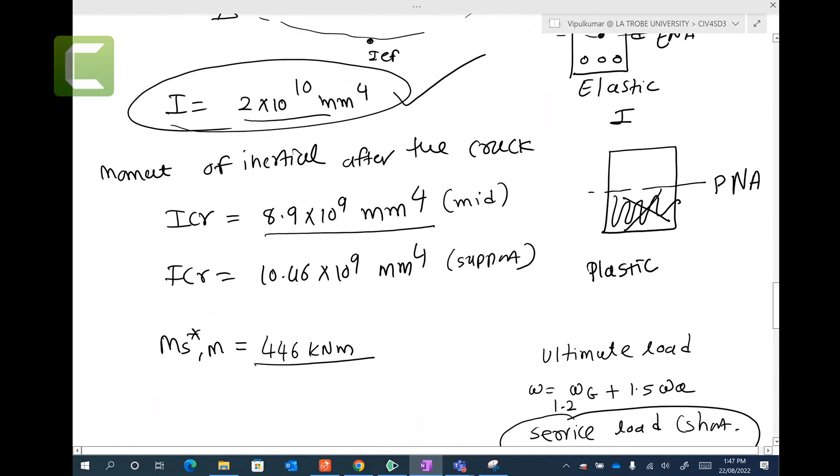So I think we calculated all. Let me show you how we can plug the values. I will just show it to you here rather than writing it; if I write it, I will not be able to finish. We find I crack, we find I gross. We found this 70, we found 446. You remember all the values are found here, right? I crack at the mid, MS we found, I gross we found. So I plug those values here. In that case, I get almost the same as this one, which is good at mid span.

Now we follow exactly the same procedure for finding the I crack at the support. When you find this I effective, we need to check. You remember this one? When you calculate I effective, you always check that it is less than I effective max, the maximum effective second moment of area, which is taken as I for reinforced sections when this reinforcement ratio is greater than 0.005. So our reinforcement ratio is 0.0052, because we calculated that before. You can see the reinforcement ratio we calculated.

Yeah, 5.2, right? So it's basically 0.0052. So we calculated the 0.0052, which is greater than 0.005. So we can take I effective as I gross. Remember I gross we calculated here. So we can take it and then we compare it, that 9 times 10 to the power 9 is less than 2 times 10 to the power, therefore it's okay.

Now supports, same procedures. It's not much different. I crack, MS. You can calculate M crack. You can just go through it by yourself. I'm not skipping it, but there is nothing I can teach you here. That's just the numbers changing. Okay. Everything I explained to you, where these equations are coming from, right? They are just the big numbers that you can go through, and you can calculate I crack. Again, make the check that you have 0.008 ratio, which is greater than 0.005. So you can have I effective equal to I, and this check is okay.

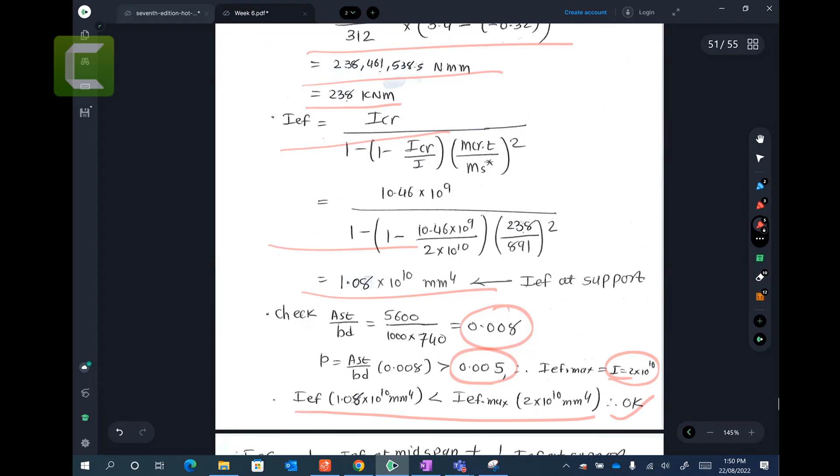So once you find these two I effective, you need to take the average, right? I showed you that one before, right? That you need to take the average, and I will show it to you in the standard as well. It says that when you have a continuous beam and an end span, you take half the midspan value plus half the continuous support. So that's the whole story, and you just take an average.

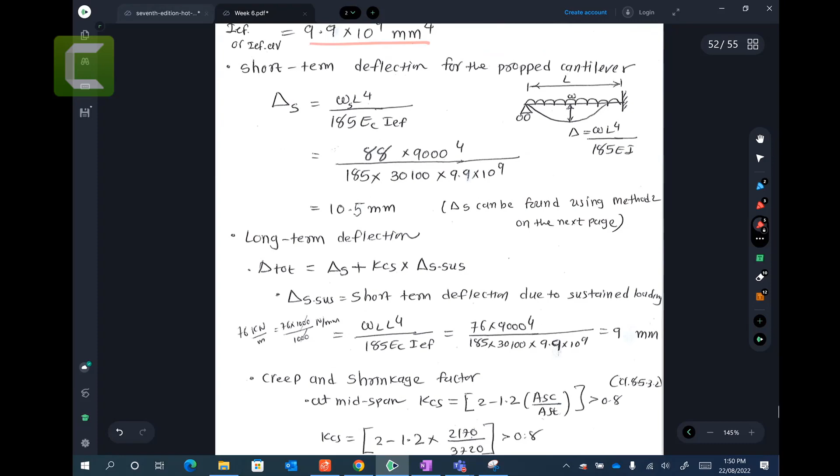Now we have these equations. You remember those equations, we have all the values. 9,000, we calculated this, we calculated this, we know this, and I effective average, you plug this value here, which is I effective, right? Remember that we calculated everything. Where is it? Here you go. We have L, we have Ec, we didn't have I effective, but now we got it. So the only hard part is to calculate I effective. Once you know I effective, you are the king, meaning you can crack it.

Moment on the left side, moment in the middle, moment on the right side. We already calculated all the moments here as well. So that's what I've done, I plug all the values. I show you again. This is repetition. Look, all these guys are just repeating. So I put 0, 10, 891, 96, this one, you get 10.1 short term.

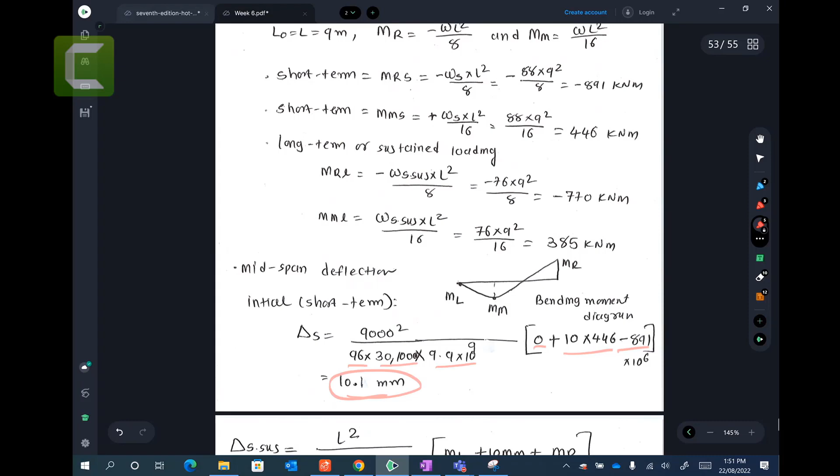For the long term, we can also calculate it. This is short-term deflection. And for long term, you can calculate this one for sustained load, because remember there are different moments, right? This is the same, but these moments are different because the loading is different. You have short-term loading, which is WG plus 0.7 WQ. And for long term, you have 0.4 WQ. So you have different W, so you have different moments only.

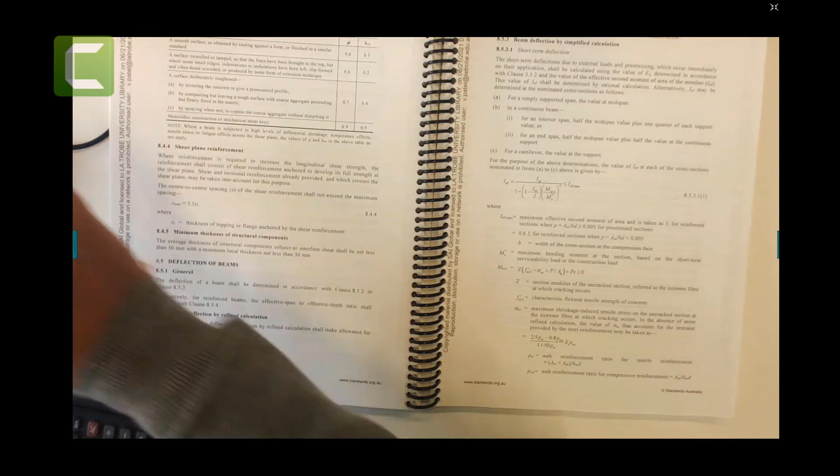So for that case, I need to explain these factors. This is long term, but you need to multiply by these long-term factors, called creep and shrinkage factors, KCS. KCS equals 2 minus 1.2 ASC over AST. It's very simple. Area of the compression steel divided by area of steel, and it should be greater than 0.8. That's the check you need to make.

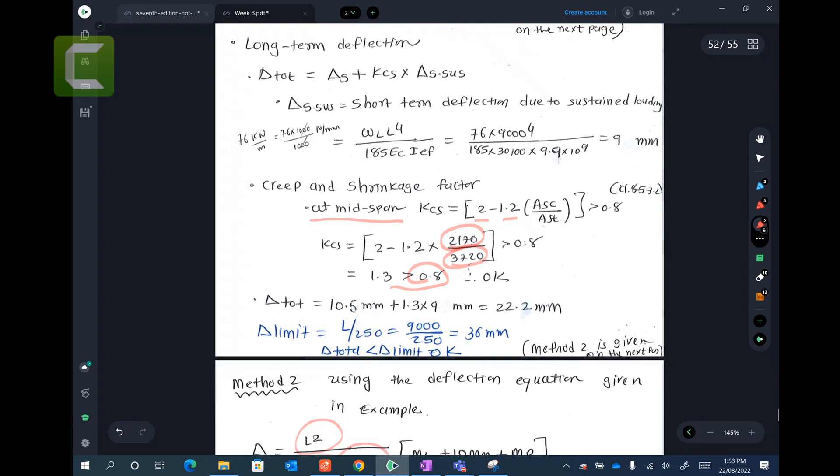So I can show it to you. I made those calculations for KCS. Yeah, here you go. At the midspan, 2 minus 1.2 times the area of the compression steel over area of the steel, 1.3, so 0.8 is okay. So here you go, 1.3, you plug the value, sustained load 8.7, 10.1 we calculated, so total is 21.41. Now you need to compare against your limits. I can show you where the limits are.

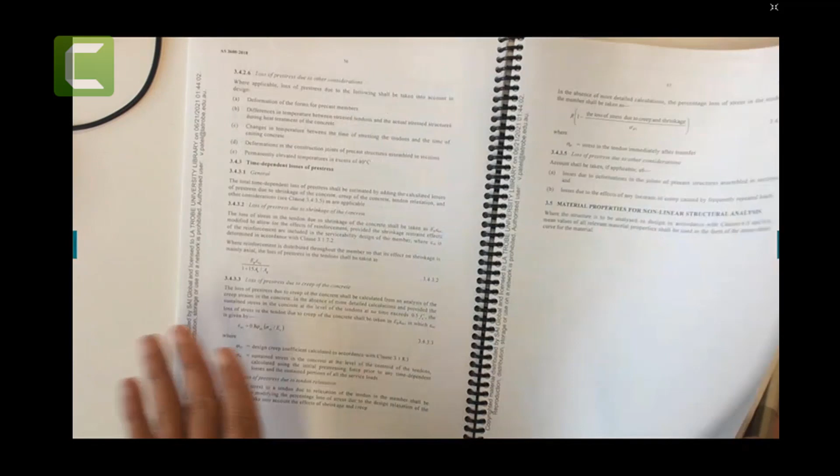If you go back to the start of section number 3, here you go, limits for calculating vertical deflection of beams and slabs. So for all members, total deflection should be delta over LEF 250. I think that is effective length there, but for your case, you just take L over 250. We have not touched effective length, but in the slab we will take you through the effective length, and then you plug the effective length value.

But for your case, just for simplification, do these checks with L over 250, L is this one, so you have 36. So 21.41 is less than 36. So we are okay. Our beam is not deflecting so much that it exceeds the standard limits. So I hope